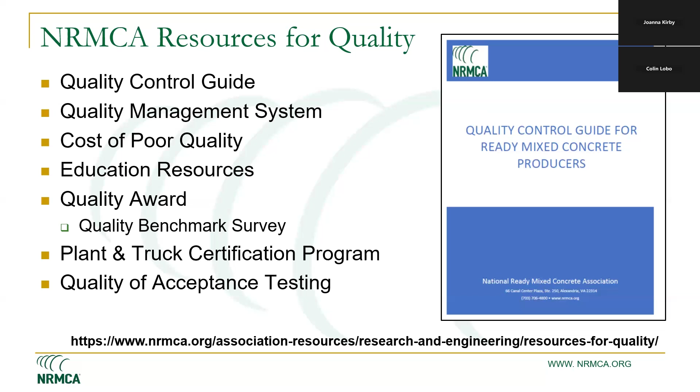These are some formal definitions of basically what we call quality control and quality assurance. In general, quality control are activities done by a producer to ensure that the concrete meets the requirements of the project, both for fresh concrete as needed by the contractor and for hardened concrete in the structure as needed by the designer of the structure. In this concept, the focus should not only be on achieving strength requirements, even though that is the primary basis used for acceptance of concrete.

Quality assurance, on the other side, is the general activities done by the purchaser or the owner to ensure that the concrete supplied to a project complies with the purchase order or the specification. In some cases, quality assurance also is the documentation internally done by the quality control processes to document to management that the company is achieving its quality goals. So that's the general difference between quality control and quality assurance.

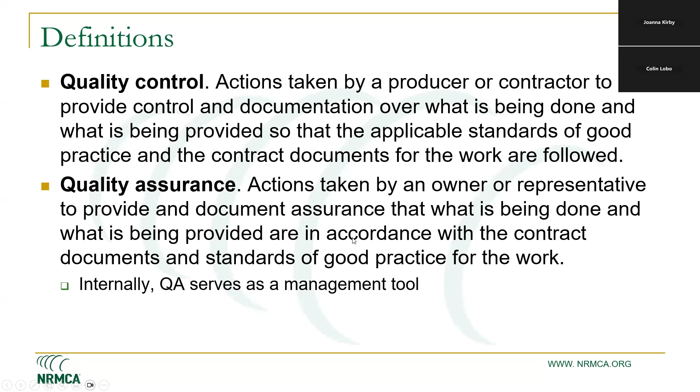These are some of the factors that influence the concrete quality. We need to make sure that we are selecting the right materials from the right supplier and that we have some control on the variability of the materials that we use in concrete. We should not select suppliers only for cost. We should also select them based on the quality that they supply and the support that they provide to manage their materials.

Concrete producers have to develop mixtures for a wide range of applications from low strength to high durability. We need to establish mixtures that meet the different requirements for different applications. We also look at the point of developing mixtures to minimize cost and to achieve the required performance.

Production processes involve checking or making sure that the scales and the other devices for measuring materials are accurate, that when we batch concrete, we are batching materials accurately. This is important both for inventory control and for the performance of the product, as well as the cost to the ready-mix producer. That also involves maintenance of different components of production and the operational activities such as working stockpiles, etc., during the production process.

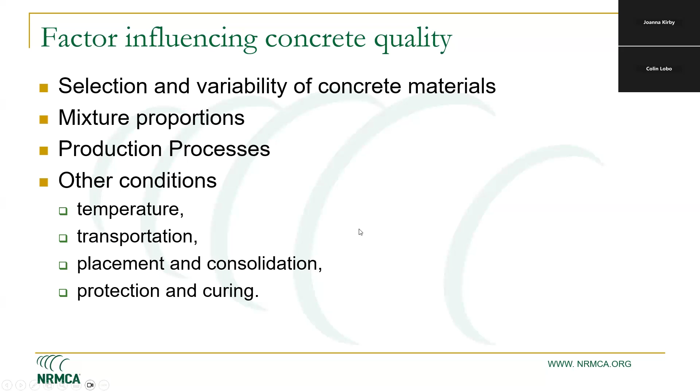There are several other conditions that have to be considered by a ready-mix producer in terms of ambient temperature, seasonal variations in temperature, distance to the job site and maintaining slump without adding too much water. Placement and consolidation methods might have some impact on how we proportion mixtures. You may have to do different things for pumping concrete, for flat slab trowel surfaces, etc. And then eventually we have to look at curing and protection of the structure during the construction process.

So some general goals. This is a statement given by a concrete producer at one of our sessions. It says that if you have an effective QC program, you simply won't have as many problems. And having an effective QC program creates more time than it takes to implement that program.

So that's a basic premise that you should consider. So in general, goals for quality control: do you know what you're putting in your concrete? In terms of, do you know the characteristics of the materials that you are using? And do you know how much you are putting into each batch, whether you're being accurate in your batching process?

After you make your concrete, do you know how it performs in terms of slump retention, air content, temperature, slump retention over time, and then eventually things like yield, strength, and any other durability properties that are needed?

When you batch different loads of concrete to the same customer, are you consistent between loads? This is very important for some applications, especially for slab construction, where you cannot have much variation between loads, especially on set time, bleed rate, and those sorts of aspects that impact the finishability of that type of concrete.

In general, you should consider that it's more effective to avoid delivering bad concrete than to troubleshoot that problem after it's delivered. It also is more expensive to troubleshoot the problem after it's in place.

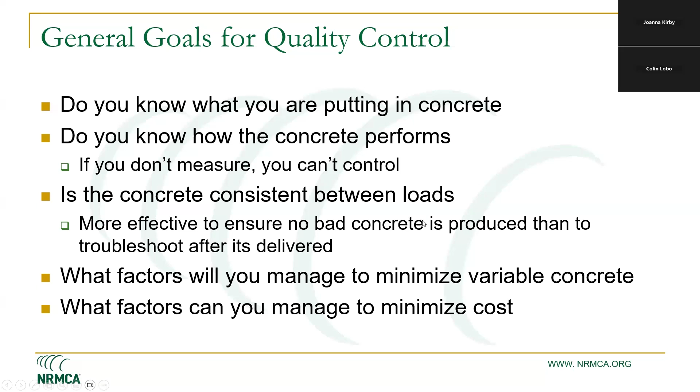The other factor is, when you develop your mix, what factors can you choose to minimize the cost of your mixtures? So in general, these are the types of scope of quality control activities: sampling and testing of your materials, and then when you make your concrete, testing the concrete. Control of the production process, procurement of resources that will improve your quality.

How do you optimize mixtures? Do you have to use 800 pounds of cement for 3,000 psi concrete? Or can you reduce that? Naturally, cement represents your highest cost in your concrete mixture.

When you get orders and specifications, is there a review process to make sure that everything that is needed in that order or specification is understood before concrete is developed and delivered? Do you have a process for field control? And some of this may be more for higher specification type work in terms of developing new types of mixtures for different types of applications, etc. So this is generally the scope.

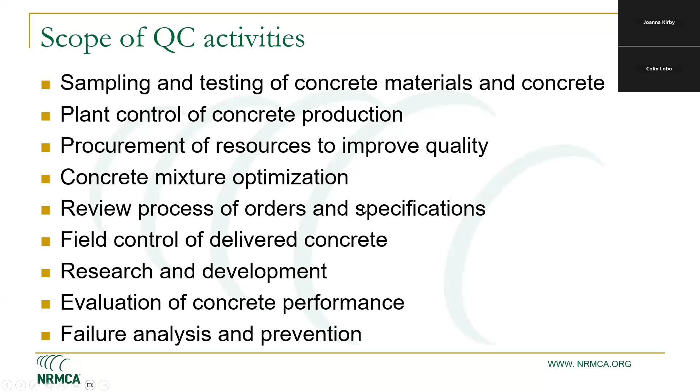Let's take a little look at the general cost. This is developed from the NRMCA annual performance benchmarking survey. So NRMCA annually facilitates this survey and publishes a report. This is a financial survey, but it's also useful to understand where your costs are and how your profit margin can be impacted.

So this chart compares average costs of a typical member who participated in the survey: the average selling price, how much the materials cost, how much delivery costs, what the plant costs are, what the fixed front office costs are, and what the average profit is.

This is also compared to the more profitable producers, the upper 25 percent of profitable producers. How does that compare in terms of their profit margins being higher? How are they varying their cost structure compared to the lower profitable producers? So you can see that there's a difference in sale price and there are some differences in their costs.

The point here also is that materials represent 50 to 60% of your sale price. So that is a big portion of the pie, and if you can reduce your material costs, you can improve your profitability. You also have other personnel in your company that impact your cost. And all should be aware of how they can impact and reduce their cost to improve profitability.

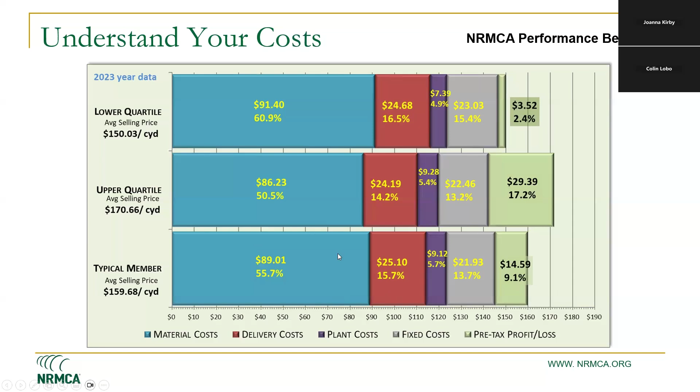NRMCA also has on its website, in the quality section, a tool that was developed by a developing industry leader group as to how you might quantify the cost of poor quality. This spreadsheet can be used internally by a company to identify the dollars per cubic yard related to the materials. If you get bad materials, what the impact is.

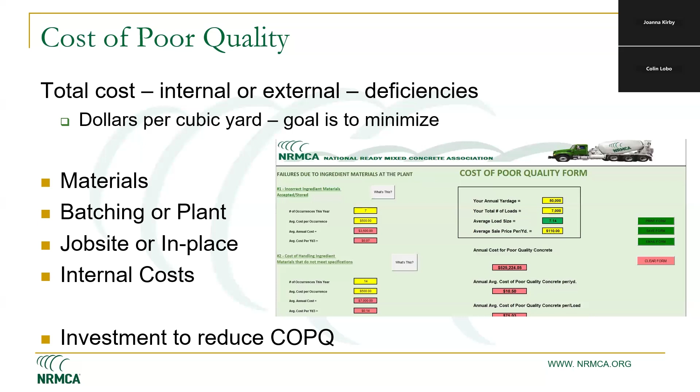What is the impact of batching or other issues at the plant? What happens at the job site, and other internal costs? And eventually you will get a dollar per cubic yard related to the cost of poor quality, and the intent is to minimize that cost. And sometimes it may need an investment in resources or people to reduce that cost of poor quality. So take a look at that, see if that can help you in your journey to quality.

Ready mix concrete is a people business, so you need to have proficient and qualified people to do the necessary jobs to ensure quality.

We recommend that you develop clear job descriptions as to the different functions that you want to hire people for, and then try to hire people consistent with those defined job descriptions.

There needs to be some internal training. All people that you hire may not be familiar with our industry, and you may have different resources available from NRMCA or internally or with your suppliers that can provide the necessary training to your new hires. In some cases, you may have to consider contractor education so that they handle your product properly and put it in place properly.

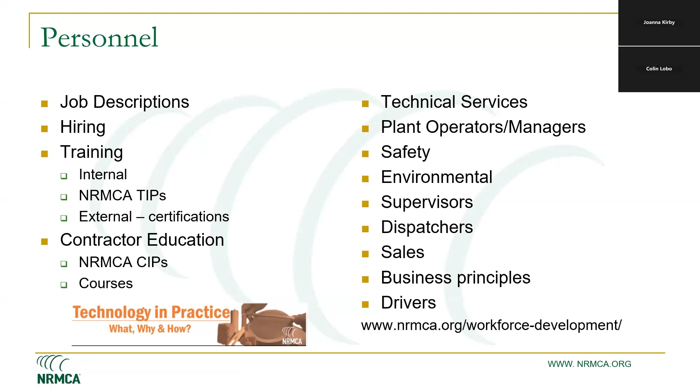These are the various job functions that may need some training programs. NRMCA has developed training programs as well as certification programs for various of these job functions. So take a look at this section of the NRMCA website that can give you an idea of some of the internal training programs as well as online offerings that can be used on demand.

NRMCA also has a one-day pretty comprehensive course on improving concrete quality. This course can help you establish some quality goals that you can then monitor to make sure that you're achieving. Processes for monitoring the variability of the various materials, the impact of batching accuracy, the importance of controlling water added to the concrete mix, impact of delivery time and temperature, how testing affects your concrete mixture quality, and then developing a quality plan and periodically auditing that to make sure that quality plan is being followed.

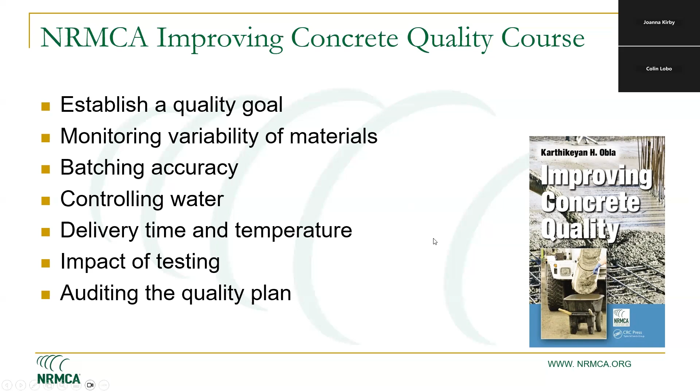We have the issue of selecting the right materials. This selection of a supplier should be based on quality and uniformity of the product that they supply and the service and support, not necessarily only on cost. Collect your material supplier certifications, keep those on file, periodically look at items on that certification to verify that these things are not changing a lot because they have an impact on your concrete quality. You might choose to do periodic testing of these materials or ask for information from the suppliers about their uniformity from their source.

The charts on the right: the one on the top is a variation of cement as being supplied from a cement supplier. As you can see, the cement strength does vary with time, and that variation can cause a variation in the concrete strengths. The chart on the bottom evaluates the uniformity of the grading of an aggregate source over time, and you can see how that varies with time. Naturally, a significant variation of the aggregate grading can impact whether that mix comes together well. So take a look at these types of resources that you might need to track in terms of monitoring the quality of your suppliers of the materials that you're using.

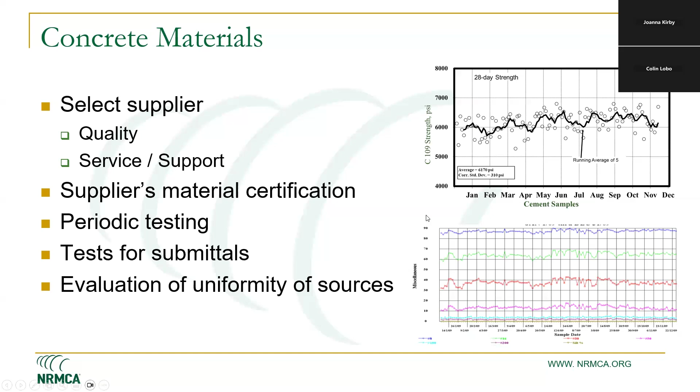You then develop mixtures. The process of developing mixtures can be an ACI process where you develop a 3-point curve varying the water cement ratio or the cement content, and then establishing these relationships for different types of mixtures that can include fly ash, can include air entrainment, and understand the impact of air entrainment. Whenever someone says, I want a 4,000 PSI mix, you naturally have to over-design that in accordance with ACI to develop a mix that has a higher strength so that you have a low chance of having test results that will fail the strength acceptance criteria.

Many producers evaluate cement efficiency in PSI per pound. Take a look at that, see how much strength you're getting per pound of cement you use in your concrete mixtures. Understand that every 1% of air that you add to your concrete reduces your strength by 5%. So try to get an idea of the impact of entrained air on the performance of your concrete. Eventually, what you want to do is to optimize and minimize the cementitious material content and minimize the amount of over-design that you produce for a specific type of project. You have to develop submittals for projects that have specifications also. So this is an important part of developing mixtures for different applications.

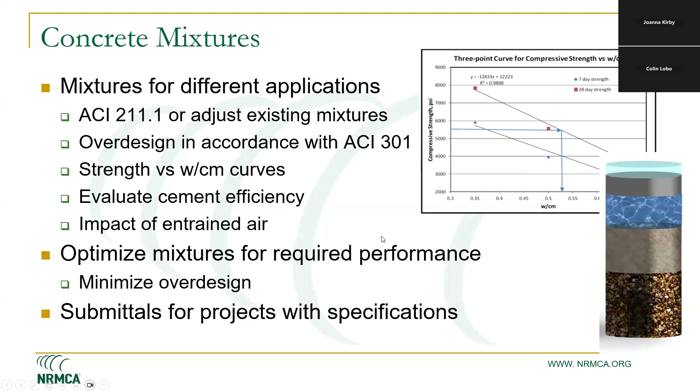Specifications and orders can vary, and it's important that the person receiving the order understands the details of what's required for the concrete. That could be the salesperson or the dispatcher. Identify all the requirements in the orders and specifications, whether there is not only a strength requirement, but other requirements such as a maximum water cement ratio, a minimum cement content, any limitations on the materials that you can use in your mixture. Obtain a copy of your specification to ensure that you know all those details.

Also make sure that the specification is achievable. Make sure that the requirements are consistent in terms of the slump requirement, the air content requirements, and if there are problems, make sure that there's communication through the contractor to the designer to correct something that may not be achievable.

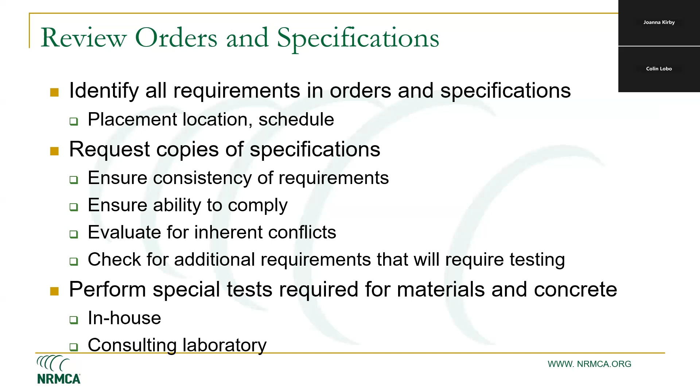In many cases, you have to develop mixes and strength test results by a 3-point curve process. You may have to develop test data for some additional tests such as shrinkage, durability type testing, alkali aggregate reaction. You might have these resources in-house. Generally, you might have a strength testing machine, but often you may have to use a third-party consulting lab for these services. Make sure that you choose a lab that is proficient, that can give you the right support, and that is qualified to perform this testing that you will use for the data needed for submittals.

This concludes part 1 of this presentation. Look for part 2, where we'll go into some more details on quality control activities related to operations and monitoring test results and other information to manage quality.